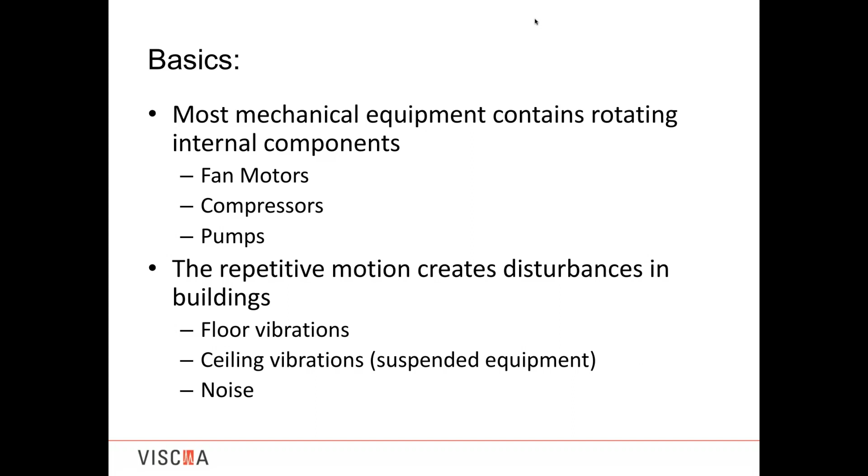Now, aside from the equipment itself creating some vibrations, the distribution systems for this equipment, since we're working in HVAC, we know we're moving air and water through ducting and pipe work. That movement of the air and water through the distribution system will create its own problems. When the pipe or the ductwork is going through a floor penetration, it creates vibration into the building structure. And when the equipment is rigidly attached to the piping and ductwork, the vibration from the equipment itself will be transferred through the ductwork and the pipe and then into the building that way.

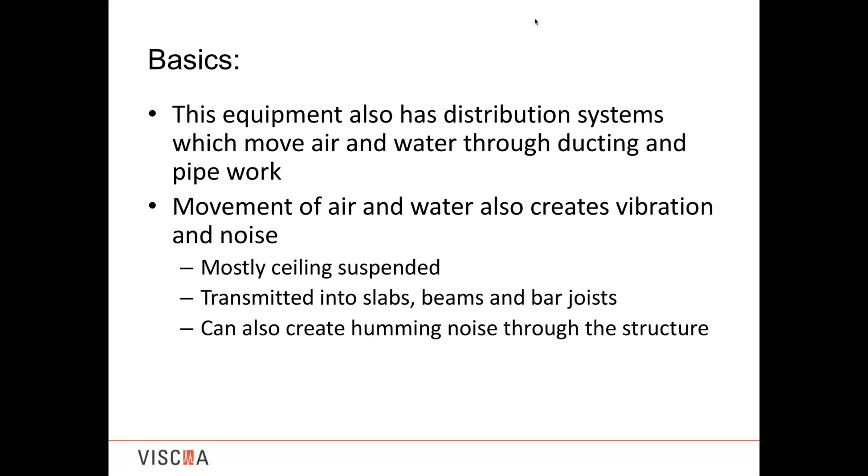You'll typically, mostly, see this in ceiling-suspended equipment and rigid mounted equipment to the base, but also the humming noise that you would get. Sometimes you won't feel the vibration, but you'll hear a sound, and that sound will be coming from vibrations where the equipment's distribution system is rigidly touching some building structure.

Now, again, we're keeping this very basic. Placing an isolator between the disturbance, which is the rotating equipment, and the structure reduces the transmission into the structure. But it just reduces, and no vibration isolation system can eliminate the transference of the energy into the building or the noise. You can never get 100% isolation. You'll always have some residual, but generally the specifications are written such that you just want to get it to where it's imperceptible to humans and it's not creating any issues within the building. But you will never get 100% efficiency.

Though the rotating equipment we typically deal with in HVAC and power generation, you'll hear discussions about inches of deflection and static deflection. Typically for it to be effective, we're looking roughly between 0.2 inches and 5 inches of static deflection. Later on, Angela will get into some of these definitions, but right now we're talking static deflection of the medium you're using as an isolator with the static load of the equipment on top of it.

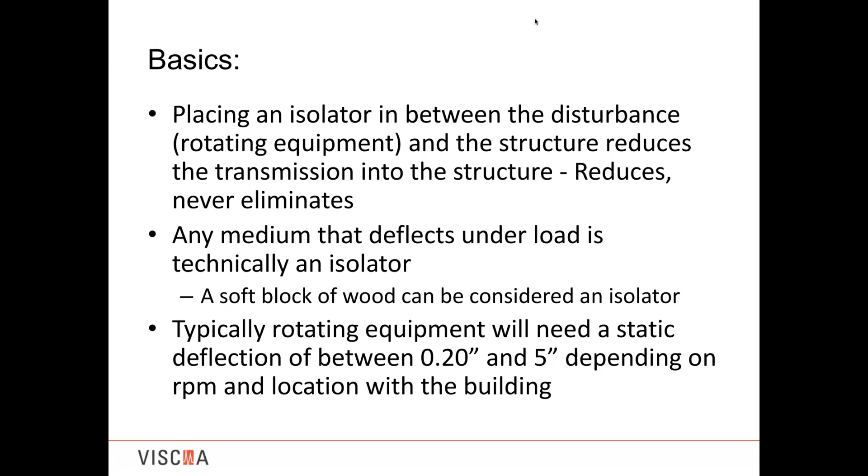And when I talked about 0.2 to 5 inches, that's what we're measuring. So obviously, if it's just a pad or a block of wood, you'll get hardly anything. If you've got a very tall spring, it can deflect on the order of 4 or 5 inches, and you have a lot of deflection in your system. It's the amount of that deflection which is critical to getting the isolation efficiency you'll be calculating later on through Angela.

Now, just deflecting itself doesn't necessarily make it an isolator. The medium you're using, after you remove the load, needs the ability to come back to its free height. If after loading it you remove the equipment and it stays where it was, it now doesn't have any static deflection. So the medium can't just be anything that squishes and stays. There are some materials that as you push on them, they stay and don't come back - that's not what would be considered an isolator.

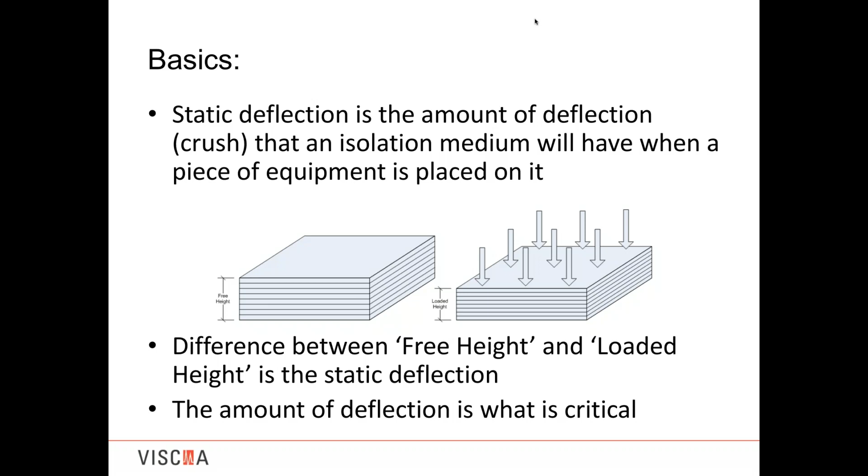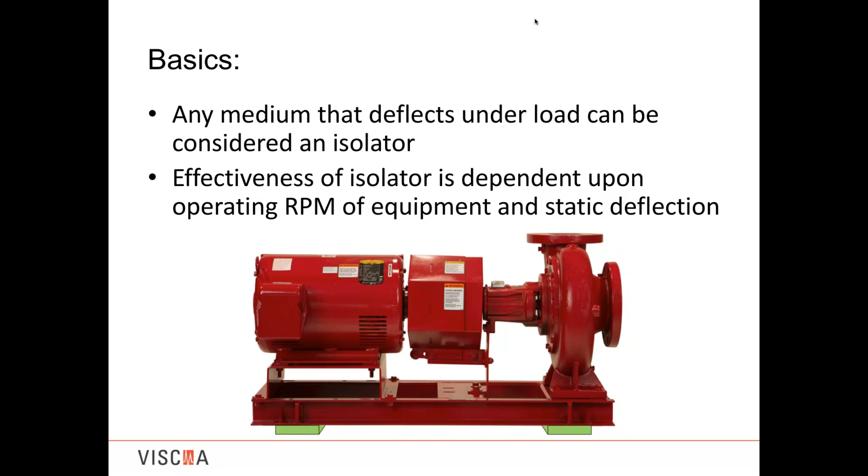In general, as the deflection increases, the efficiency increases at the same RPM. And that gets a little confusing, because what's happening is your required deflection becomes inversely proportional to your RPM. So as I have a piece of equipment with higher RPMs, I need less static deflection to get the same efficiency, and it may be counterintuitive at first.

A lot of the newer equipment out there, due to energy efficiency standards and such, will have variable speeds built in. So when you're asking for the RPMs, you may be receiving the highest, and you always have to verify there's no variable speed drives that will bring the motor speed down. Obviously, cooling towers are the big issue with these, if anyone's familiar with those. They have variable speeds down to the order of 300 RPMs, and they may have been designed a little faster, so you'll have a system that may only have 1 inch of deflection, and your efficiency drops dramatically.

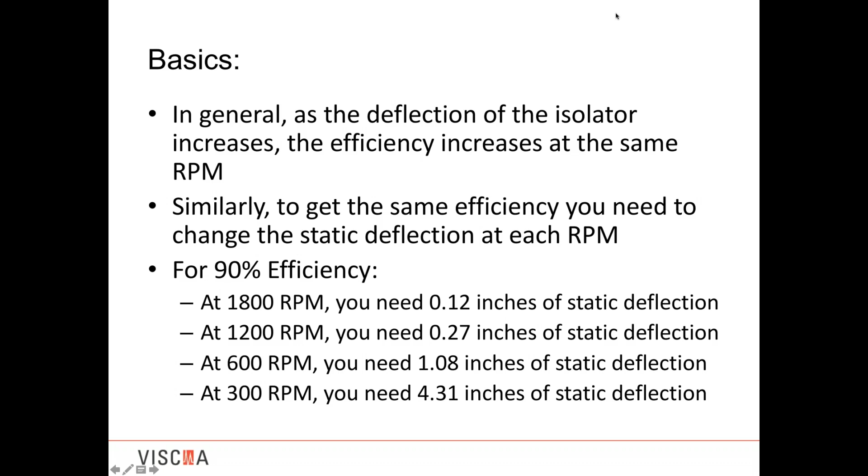In ASHRAE Chapter 48, and generally in our industry that VISCMA deals with, we discuss inches of deflection and RPM. We do not get into hertz or cycles per second as would be done analytically. Using RPM and inches of deflection, or its equivalent analytically in hertz, but it's not necessary since this is the information most people will get from a manufacturer, the RPM of the motor, and from the manufacturer of vibration isolators such as Kinetics and VMC, you get the inches of deflection of our springs. So ASHRAE Chapter 48 relates those two rather than going into frequencies in hertz and cycles per second.

So we've kind of, I don't want to say dumbed it down, but it's industry vernacular that we use that makes it a little simpler to compare two systems side by side, rather than worrying about the natural frequency of the system. What's the RPM? What's the inches of deflection on the springs underneath? They get you roughly the same efficiency. Well, thank you for that question.

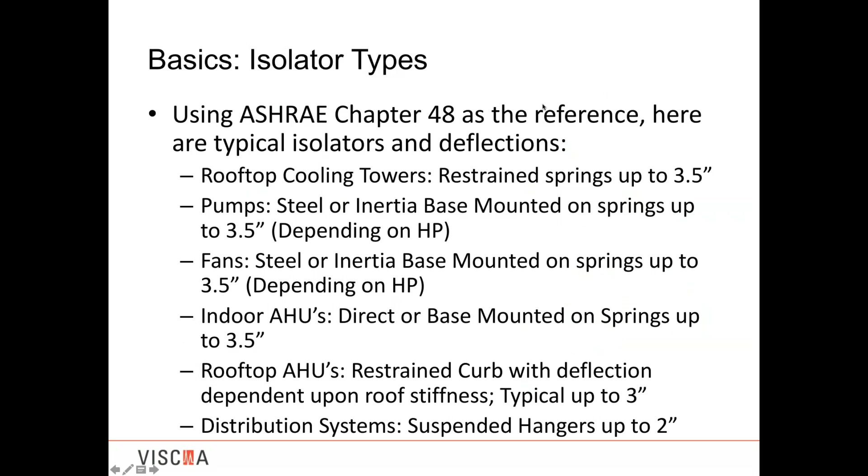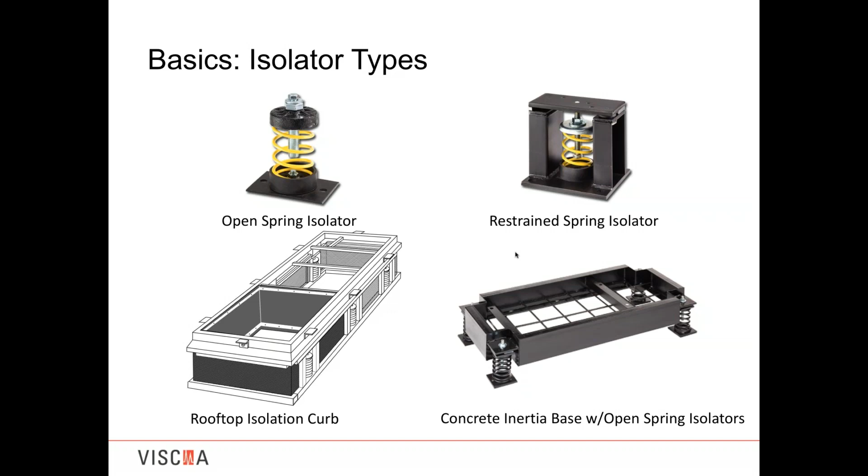They fill it with concrete in the field. After it cures, they can attach the pump or the fan to it before they lift it. It helps with the rocking motion, but most of the benefits of doing the analysis of an inertia base is outside of the basics. You'll see many pumps in the basement of buildings on these inertia blocks, and they can be offered with either of the two spring types on top, an open spring or a restrained housed spring, for the same reasons.

What I'll do now is I'm going to transfer it over to Angela Waters, where she'll get into more of the theory and the math, and she'll take it from there. Thank you, John.

Okay, I'm going to talk about the theory, the terms and definitions. John has touched on these a little bit as he's been going through the basics and introduction to vibration this afternoon. So vibration is basically undesired motion, and it's transmitted to the building structure and the occupants.

My background, I'm a structural engineer by education and training. Just as a load in a building has a load path, vertical and horizontal, noise through a building has a noise path. And when you're talking about vibration, vibration causes structure-borne noise. So you're basically taking a vibration that's an undesired motion and transmitting it to the building structure, causing it to vibrate and create a noise path.

So the isolation, how we counteract this vibration, mitigate it, minimize it, not eliminate it, as John mentioned, is we separate the source from the receiver. The source, an example would be a cyclic running fan, and the receiver would be the floor structure or roof structure. So we want to separate those with isolation, and that isolation in our industry is often a spring isolator.

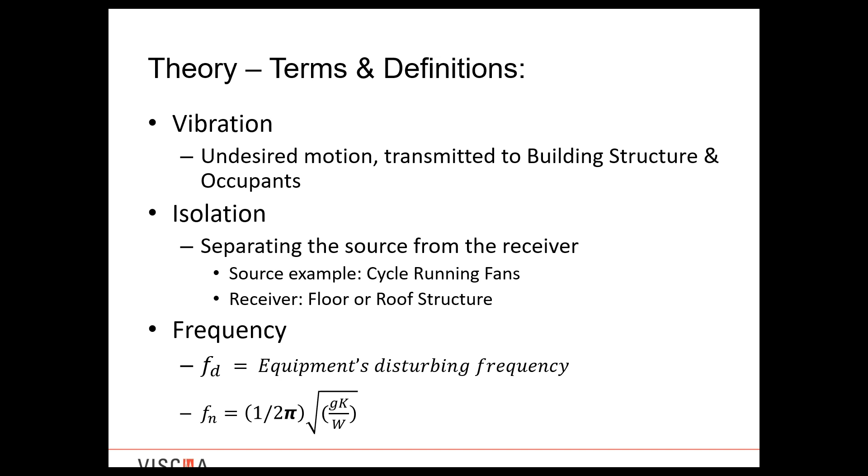So when we talk in terms of frequency, this F sub D is the equipment's disturbing, or driving, frequency. And F sub N is the natural frequency of the material or substructure, and that formula is 1 over 2 pi in the denominator, times the square root of gravity times your spring constant in the numerator over the weight in the denominator. We'll see later that you can have that in different terms of the variables.

So when we talk about deflection, and John was talking earlier about how in our industry we talk about cycles per minute or inches of deflection, you can have vertical or horizontal deflection. But again, it's that translation, that movement that's deflecting. Typically when we're talking about equipment, usually it's a vertical deflection. If we get into concerns regarding wind and seismic on that equipment, then we have to consider horizontal translation or deflection.

So the next two concepts are basic, but then they start to build like building blocks when you're learning new concepts. Later on I have some slides that visually show this, and I might advance to those so you can have a visual aid here. But you have a single degree of freedom system: there's only one object that is significantly moving in the system.

If you could picture a slab on grade, a concrete slab on soil perhaps outside an office building or hospital doctor's office, and you have a pump or piece of air conditioning equipment bearing on that slab on grade. The fans and motors inside are moving, and you probably have some internal isolation within that piece of equipment, but preferably the slab on grade is not moving. So the only thing with moving parts is your equipment; your slab on grade is stationary.

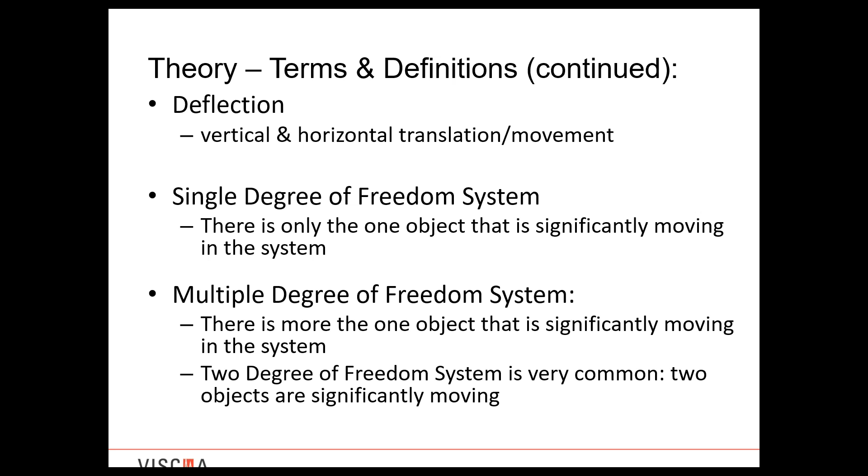So that example would be a single degree of freedom system. Now, when you have a multiple degree of freedom system, there is more than one object that is significantly moving in the system. An example we'll see on the next slide, but this example is a 2 degree of freedom system, which is very common: 2 degrees, 2 masses of equipment are moving.

So in this example, you have an internal fan of equipment moving, and the springs of the isolated equipment were both moving. If you think back to that illustration John had up with the 4 different types of spring isolator restraints, if you had a curb in that bottom lower left hand that had springs in it, that curb would be deflecting as well as your equipment is also moving.

So this really becomes a reason why internal and external isolation is either to be avoided or considered only when absolutely required, and much care has to be taken in the selection of isolation systems when you have a 2 degree of freedom system.

So typically on that slide with the 4 spring isolators as visual aids, in the bottom left corner with the sheet metal curb, or in the bottom right corner with the concrete inertia base with the springs, equipment bearing on that would not have internal isolation. So the only thing moving in the equipment would be the cyclic behavior of the fans and motors, but then you'd also have the springs and the isolation sheet metal curb or inertia base moving.

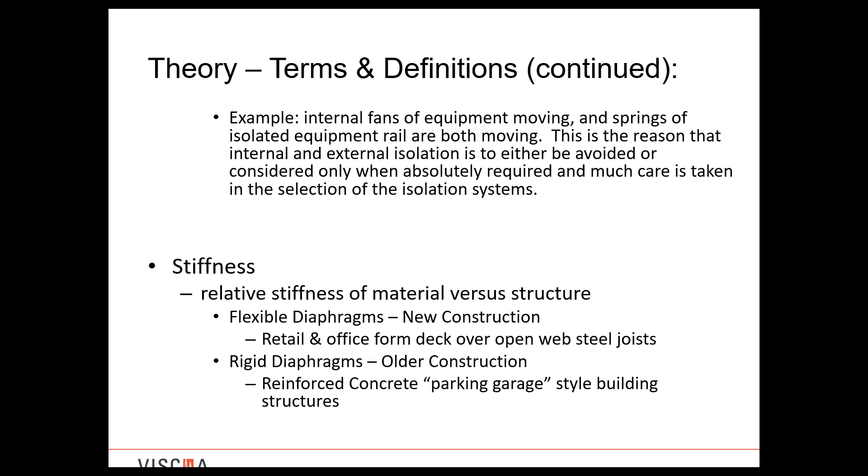Okay, so now we're going to talk about damping. We normally talk about damping in terms of a ratio, and damping is an attribute that all materials have. It's an intrinsic attribute that they have.

Office buildings 30, 40 years ago experienced a lot less vibration than they sometimes do today, and that was because those buildings were filled with all kinds of materials that provided damping just by the nature of their material. Filing cabinets full of paper documents would have provided extra damping. Additional partition walls, when you had true offices and less open cubicle space, would provide additional damping. So as our construction industry evolves, and how we use office and workspace evolves, vibration is oftentimes now a much more significant consideration in office buildings because we don't have as much of this damping.

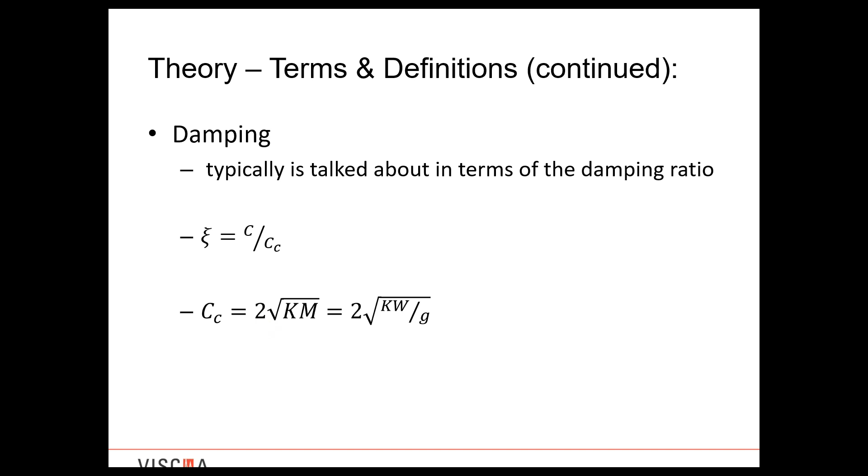Carpet provides damping. But as I mentioned, we talk about it in terms of a damping ratio. So looking at the damping compared to the critical damping here, this first equation, xi equals C in the numerator over the critical damping in the denominator. And the critical damping in this denominator is equal to 2 times the square root of your spring constant times your mass, or rearranged in terms of weight and gravity, 2 times the square root of the spring rate times your weight over gravity in the denominator.

And again, the damping factor is due to the damper, the dash pot, and C sub C is the critical damping of the system. You can provide measured or calculated damping through Coulomb dampers, which allow for some control over the variable damping ratio. Again, it's often expressed as a percentage of this critical damping ratio.

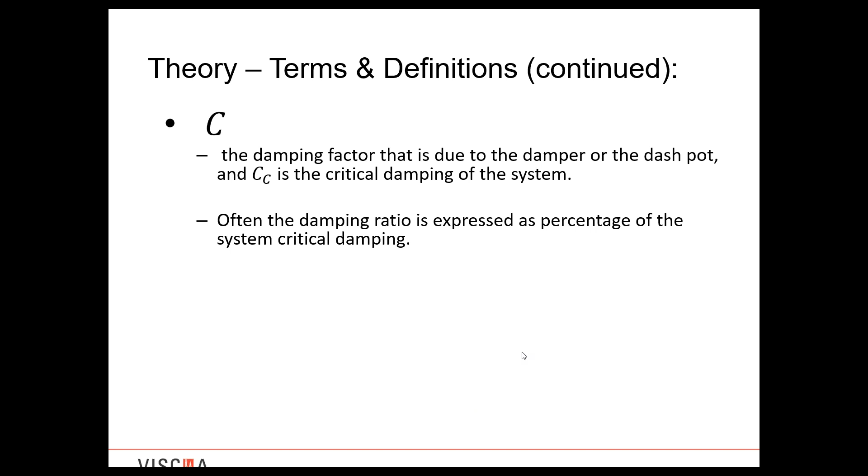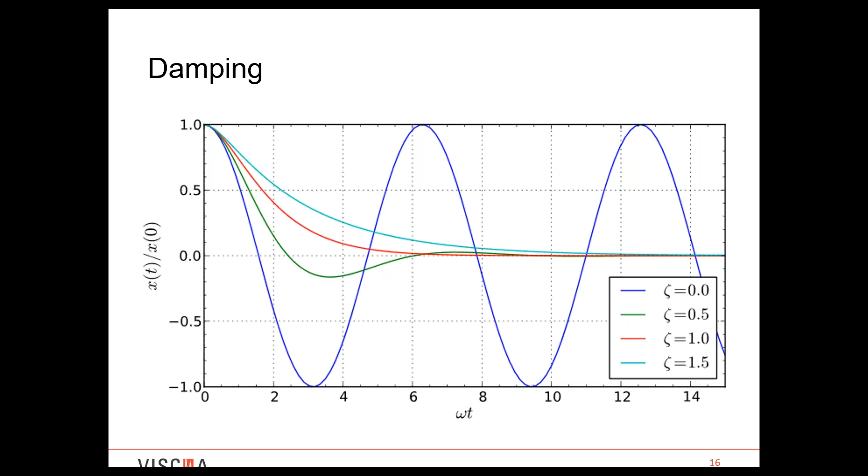So here's a chart to help illustrate what I've been describing with damping. You see this red line where our damping ratio is 1, and that is at your critical damping. The royal blue line, with just a large amplitude wave, has a damping ratio of 0, meaning you have no damping, which is considered underdamped. This green line, which also has quite a bit of amplitude wave, is also considered underdamped. And the cyan or turquoise line, we'd consider that overdamped. You're not going to get an additional advantage in isolation efficiency when you're over that damping ratio of 1. In this example, that turquoise line is a 1.5 damping ratio.

So again, as I mentioned, those at 0 and 0.5 were underdamped systems, and the system at 1 is ideally what your goal is to shoot for, the critical damping ratio of 1. Obviously where it was over 1.5, it's an overdamped system, and you're not getting much advantage for that additional damping. You won't see it in the isolation efficiency. So I mentioned earlier a single degree of freedom system.

I painted the illustration of having equipment on a slab, outside a hospital building. That slab ideally is not moving, it is bearing on the soil, and it's just the equipment that is moving. So you just have a single degree of freedom system with damping here in this illustration. On the right is your spring constant, K, and here is your damper through a dashpot or a Coulomb damper that's providing some damping to your mass here that is moving. So that would be a single degree of freedom system.

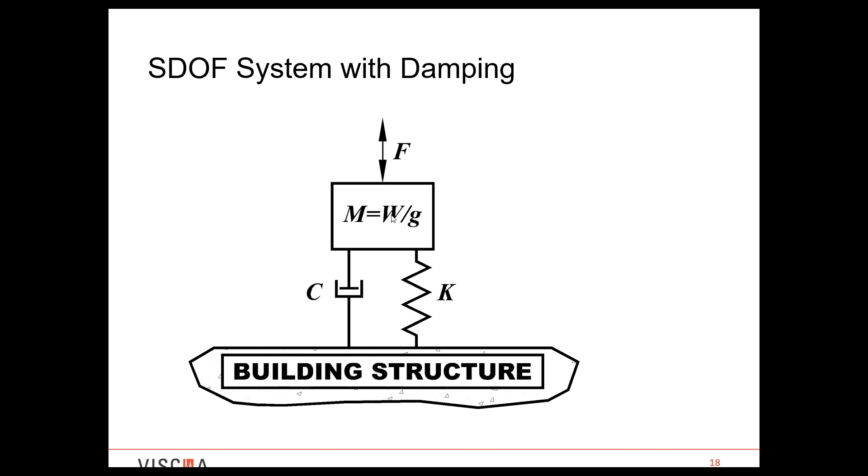Transmissibility is the ratio of the displacement of the building to the displacement of the mass. In our example, the equipment is also the ratio of the force exerted on the building structure to the driving force. It's the value that engineers and consultants use to evaluate the dynamic force acting on the building structure or the degree of force attenuation present in the system.

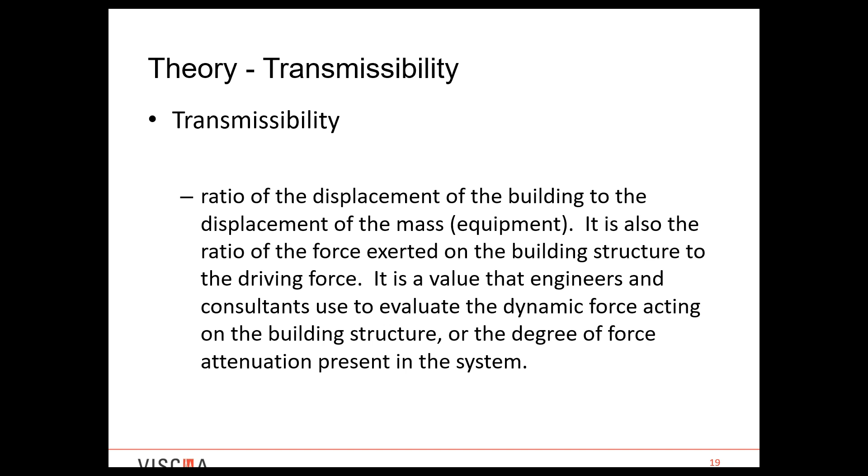So that's a term that if you're not familiar with it can seem a little overwhelming or abstract at first, but hopefully we'll show with some charts and equations to help everyone understand where that transmissibility is coming from.

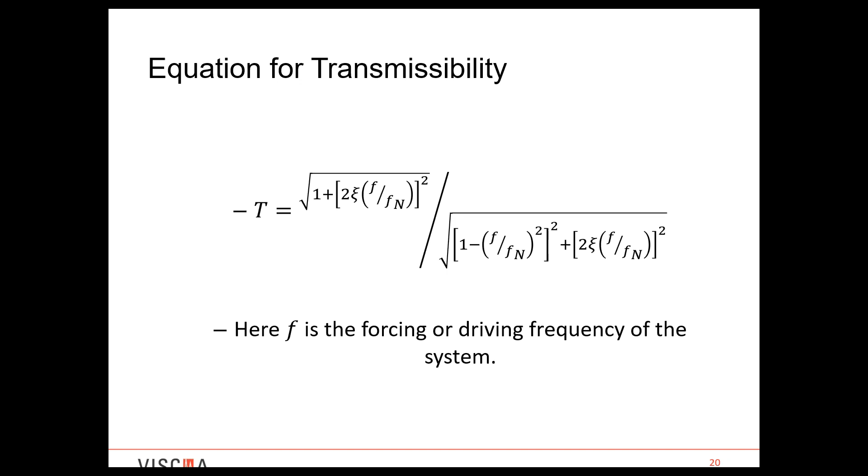If you look at it in equation format, in the numerator you have the square root of 1 plus this term: 2 times your damping times the ratio of your driving frequency F over your natural frequency F sub n, and that term is squared. That's all over the square root term where again you have 1 minus the ratio of driving frequency over natural frequency squared, that term is squared, plus another term squared, which is 2 times your damping ratio times your driving frequency in the numerator divided by your natural frequency in the denominator. So that is the equation.

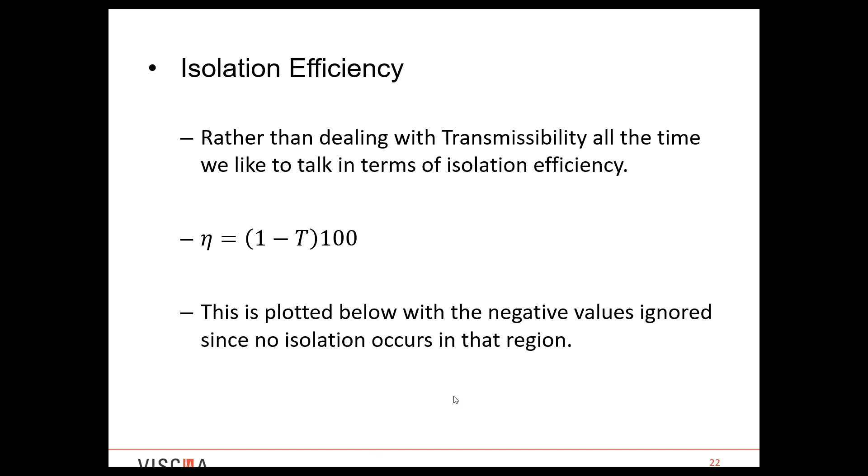So rather than dealing with transmissibility all the time, since it's kind of abstract or overwhelming if you're not familiar with the term, we like to talk in terms of isolation efficiency, which is basically if you take 1 minus your transmissibility times 100, that is your isolation efficiency. We have it plotted in the next chart here.

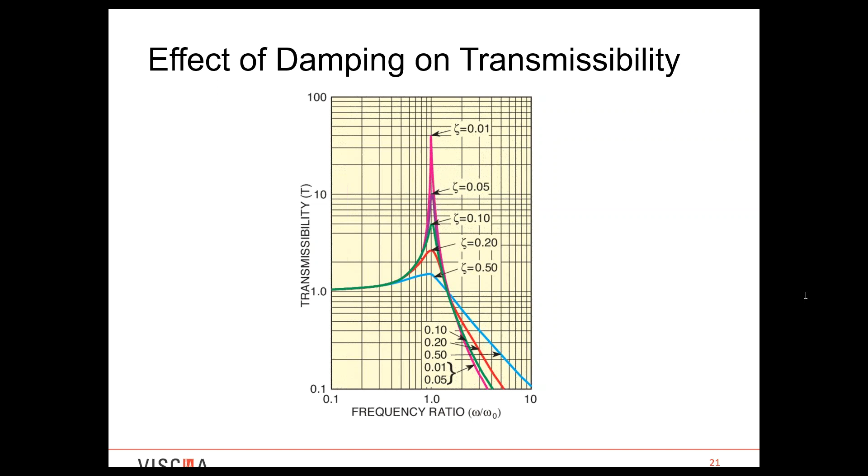Okay, so we've discussed this isolation efficiency curve pretty thoroughly here. So really, how much isolation is required? The ASHRAE Handbook Fundamentals Chapter 8 states that for most normal isolation applications in HVAC, the isolation efficiency must be at least 90%. In order for this to happen, ASHRAE recommends that we're greater than or equal to 3.5 for our driving or disturbing frequency in the numerator compared to the natural frequency in the denominator.

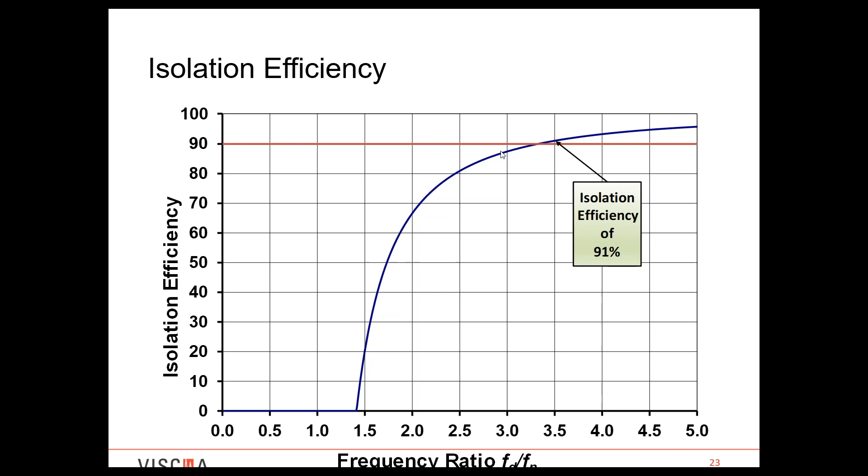Really that goal is so that subjectively people in the building are not going to be affected, since vibration can be very subjective. You'll have some customers who are very sensitive to the feelings of vibrations, and some who are very sensitive to any sound created from the structure-borne noise of vibration. But again, if you get up at that 90% mark, you should meet the subjective goals of the people using that building. If you're a little bit less, at 85 or 88%, you're going to meet most of those people. But again, the goal should be to try to get as close to that 90% isolation efficiency from the ASHRAE handbook as possible.

So here, looking at isolation efficiency at various revolutions per minute, RPM, as John described in previous slides in his bullet points. I have to make sure I look at this correctly because we have 2 shades of blue. The 550 RPM in a lighter, slightly light blue color is to the inside of this chart, so it's to the inside of the red, which is at 875 revolutions per minute. The green is at 1,350 revolutions per minute, and the dark blue again is at 1,750 revolutions per minute.

So as John was illustrating earlier, it is an indirect proportion. If you're looking at a static deflection of 2 inches with the 550 revolutions per minute, you're going to be at 93, 94% isolation efficiency. But you'll obtain that same 93, 94% isolation efficiency if we look at the green at the 1,350 revolutions per minute, where now you'd probably have a static deflection of less than half an inch, probably around a quarter of an inch or so. So again, it's an indirect proportion, but it's good to know what the isolation efficiency looks like for various RPM, various revolutions per minute.

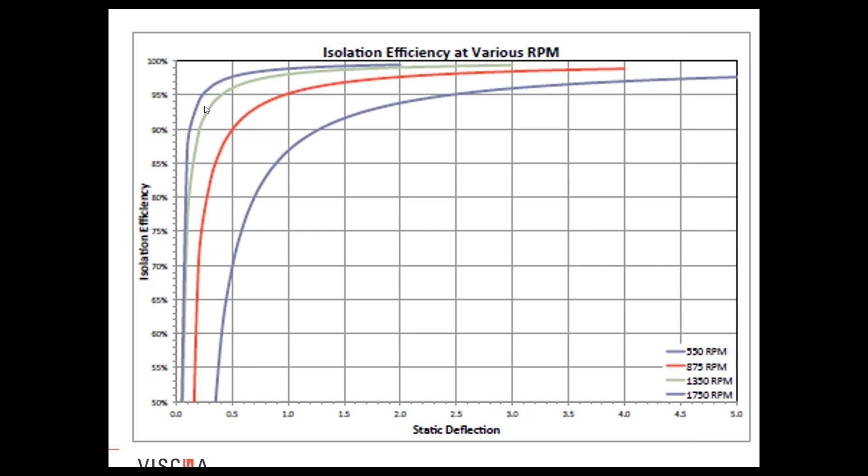If we think about deflection, we want to think about nominal deflection versus actual deflection. John illustrated before that deflection is the difference between the free height, or unloaded height, and the material loaded on the right-hand side of his slide. That deflection is our goal, and we need to think about that. But oftentimes in specifications, if they're not too specific, they'll list deflection which is nominal or approximate. What you actually have in operating conditions out in the field is your actual deflection.

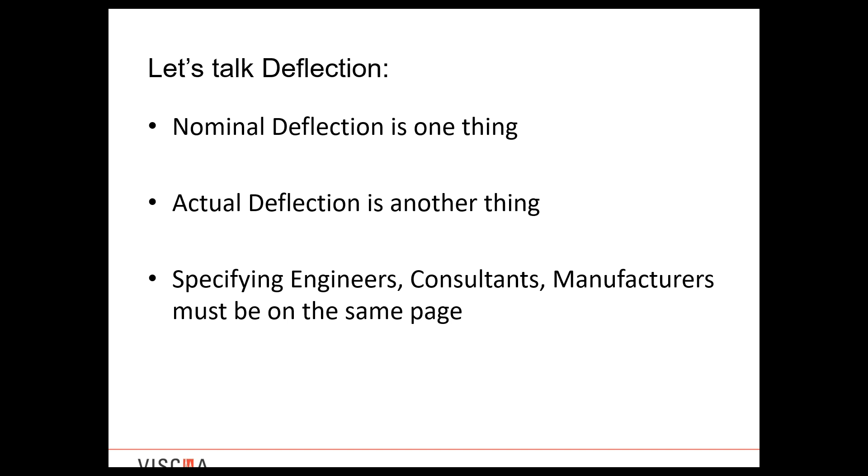So when you're working as a team, whether in the schematic or development design phase of the project, the specifying engineers, engineers of record, consultants, manufacturers, and sometimes even contractors and subcontractors, we have to be on the same page understanding the specification for a particular project.

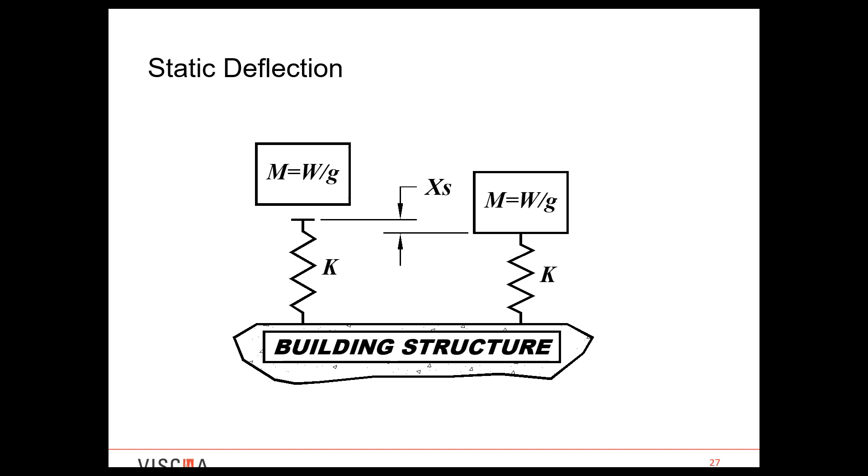Looking at static deflection, if you have your building structure, and on the left you have your mass or weight divided by gravity, and your spring hasn't been loaded yet, that static deflection once it's loaded is shown on the right. So it's that static deflection. As John mentioned earlier, it gets confusing once you get into spring isolators, especially since spring isolators in our industry have an opportunity to have a preload at some point. Just because you're talking about a 4-inch deflection spring or a 2-inch deflection spring does not necessarily mean that spring is going to deflect that amount after it's already loaded. So we get into terms like differential deflection, which is the deflection you're going to see after the isolator is loaded.

Looking at just the static deflection from the weight itself, you can express it in terms of natural frequency: f_n equals 1 over 2 pi times the square root of gravity over your static deflection, x_s, where that static deflection equals your weight in the numerator divided by your spring constant in the denominator.

If you set gravity in English US customary imperial units to 386.4 inches per second squared, you can look at it in the units of the second equation here, which is often used by consultants: 3.13 times the square root of 1 over your deflection. From my university days, I tend to think of gravity as 9.81 meters per second squared, or 9,814 millimeters per second squared. You can think of it in terms of that gravity with 15.77 times the square root of 1 over your static deflection.

I hope this is giving you some definitions and ideas of how we look at vibration isolation efficiency, transmissibility, and a bit about damping, although John is correct that typically in our industry we can't count on damping. So unless it's specifically designed, we presume that damping ratio is zero. At this point, I'm going to turn it back over to John, and he's going to give you some good ideas of what not to do, and hopefully what to do.

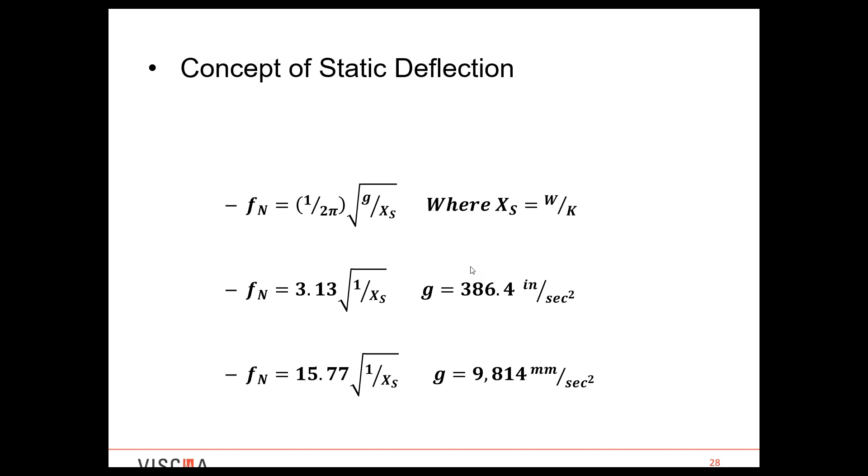Okay, hopefully everybody sees the best practices, do's and don'ts screen. But before I move on, I wanted to address one or two questions that were popping up as you were going through, Angela.

You ended up on a good slide there because I guess we ignorantly or arrogantly assumed everyone understood we were using imperial inches-pound-second units. Most of the time when we're discussing weight, we are talking pounds force, not pounds mass. Obviously when Angela had a few equations up there, she threw in G. Hopefully that answered the question, but I want to address it for those who weren't looking: when we're talking weight, we're assuming pounds.

Somebody brought up a question about Chapter 48 in ASHRAE, and it's worth repeating rather than answering it independently. The question was whether or not the assumptions in Chapter 48 are overly conservative. I actually look at conservative as a subjective term, and I made sure to stress that the members of ASHRAE TC 2.6 have many years of experience. So maybe analytically something may show as a little overly conservative, but it comes from practical experience, knowing what to do and what not to do. You may wonder why something requests 3.5 inches of deflection when analytically it doesn't show so, but I put my faith in the experience of those engineers, knowing there's a reason, that they've had issues, they've seen, and they understand. But if you'd really like the answer on whether the charts in Chapter 48 are overly conservative, I'd send ASHRAE TC 2.6 that question and see the answer that comes back.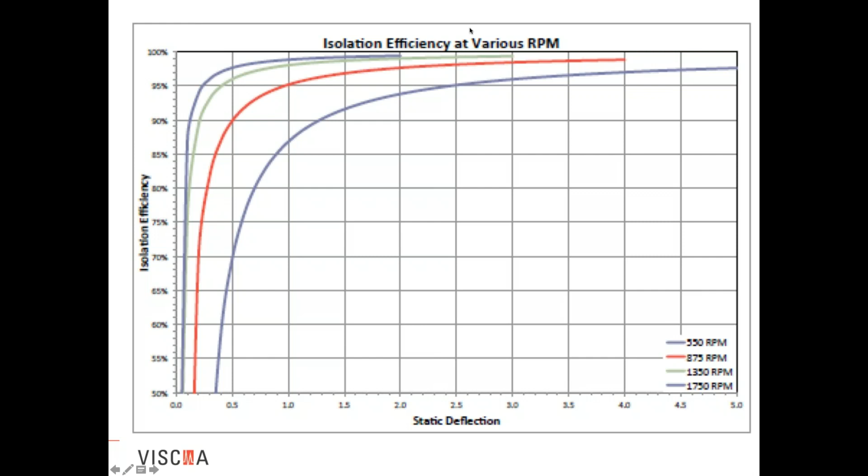Obviously, if you're selecting it down here, first of all, you're selecting it improperly. But now, yes, minus 20%, I dropped 10% in my isolation efficiency - not a good thing. So all the selections that manufacturers of VISCMA will be making are up in this range of the curves, such that any minor change from nominal to actual will not affect your isolation efficiency. It's an important point to remember when you're looking for problems, trying to find problems, or just reviewing an installation submittal.

All right, so now I'm going to get into some quick slides on what to do, what not to do, what we typically see as an association in the field that happens. And the biggest issue we see is non-adjusted isolators.

Most problem phone calls we get from installing contractors, hey I have a problem with this installation, or users of a building - it's the isolators are not adjusted. So our first answer to all of those questions is please take a picture and send us a picture of the installation. It is extremely important, whether you're an engineer, specifying mechanical, or the installing contractor - I don't know who's on the call - but please make sure the installer reads all the instructions. Every manufacturer has slightly different variations. You can't say, well, I've been installing manufacturer A's isolators, I know how to do manufacturer B's. It doesn't work so simply. Read the instructions, and a large portion of your problems will go away.

And the next biggest issue we see are rigid utility connections - piping, ductwork, conduit to the equipment. I can't stress enough how, especially on pumps, flex connectors must be on there. Something has to be flexibly connected. If you're rigidly attached to the next series in the system, and that next series is non-isolated, you have a rigid path for your vibration to go through, and it doesn't matter how many inches deflection you have underneath your pump - you're moving that vibration downstream. So flexible connectors on everything, especially conduit coming up from the slab underneath going into your equipment that's running the electrical wire or a gas line - they have to be flexibly connected. You're just going to completely short circuit the isolation.

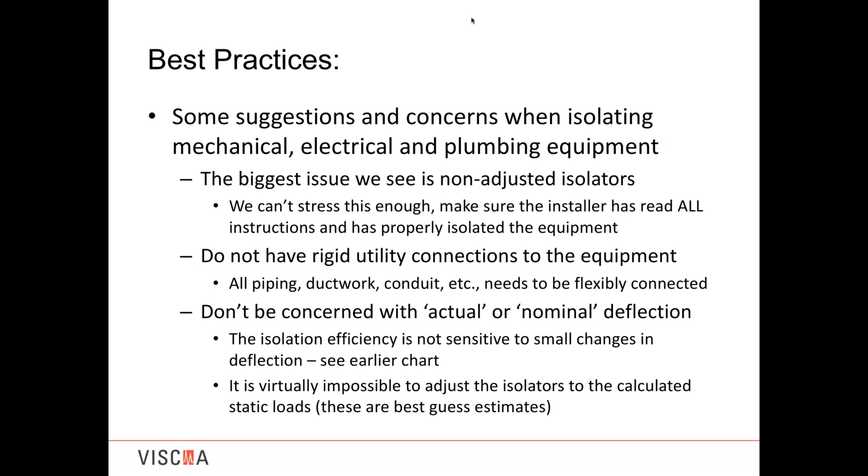One other thing I don't know if I mentioned before I move on: Angela touched upon internal isolation. Some of the bigger pieces of equipment have internal fans that are isolated. If you're putting an isolator on the outside of that equipment, you need to lock out or put the blocking back in for the internal piece of equipment. Otherwise, you have a spring on a spring and you run into other issues. That happens very often. Rooftop units will have springs underneath the internal fans, but if you're putting them on a 2 or 3 inch deflection curb, that internal fan needs to be locked out.

Another issue we see, and I'll show it on further pictures, but you may have seen or heard of them: shipping spacers. The housed isolators are typically shipped locked out with shipping spacers, such that the free height of the isolator doesn't change after you install and adjust it, so all your piping and plumbing into the equipment doesn't need to move. But you need to remove the spacers since they're short-circuiting your isolation. Every manufacturer has their own installation instructions, but most importantly, you should never remove any of the spacers until you can remove all of them.

As you're adjusting one corner of a piece of equipment, you're transferring weight back to the other corner. So if you've removed those spacers, you're going to bottom out the opposite corner of the equipment. It's no different than watching NASCAR, where they turn screws on one corner of the car and move weight to another corner. It's very similar on a piece of equipment adjusting isolators. You need to keep the shipping spacers in there until you can remove them all, and then you'll level out the equipment without short circuiting it.

Another issue you have to always concern yourself with is point support. I have a picture later on to describe it, but in general, some equipment is not designed to have a spring or isolator supporting it at a discrete point. It needs distributed loading so it doesn't buckle or collapse, and it's the manufacturer of the equipment who determines that. Many of those that require continuous support will send out a submittal cut showing this. You need to look for it, and if the manufacturer says so, you need to follow his instructions. If it wasn't designed for point support, you will have structural issues with the equipment after installation.

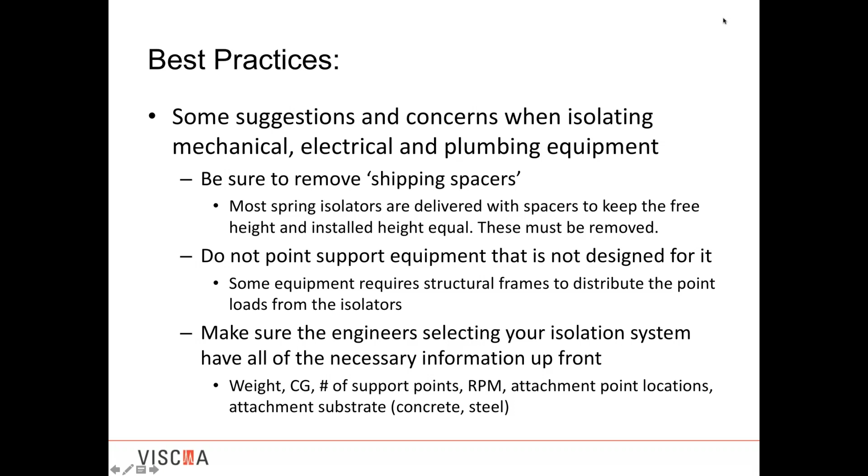Let me go back to my slides. All right, so here are some field issues. I've got a few pages showing some field issues we run into.

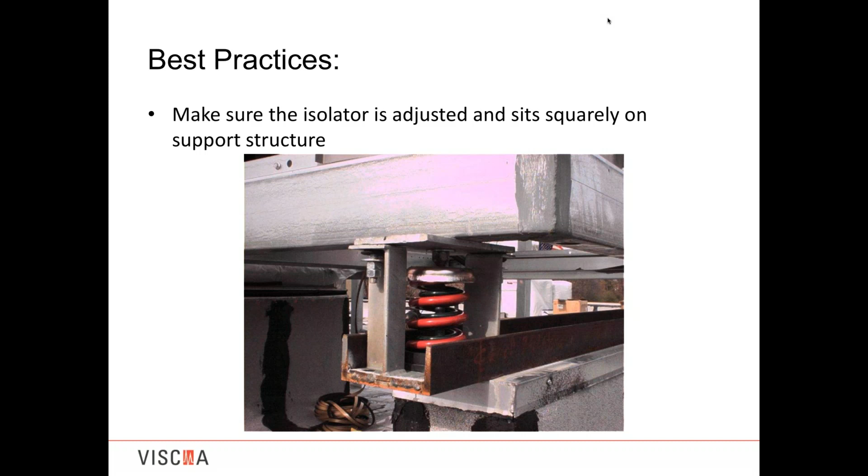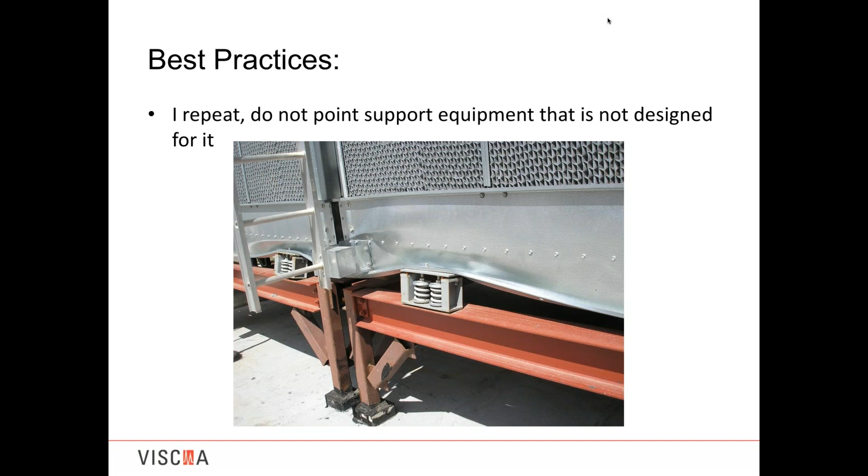And that's the last one. Now I'll double check if we have another question about minimum deflections. All right, so the question deals more with Chapter 48, and at this point I think it's outside the scope of where we're going. Some of these questions are more directed towards ASHRAE.

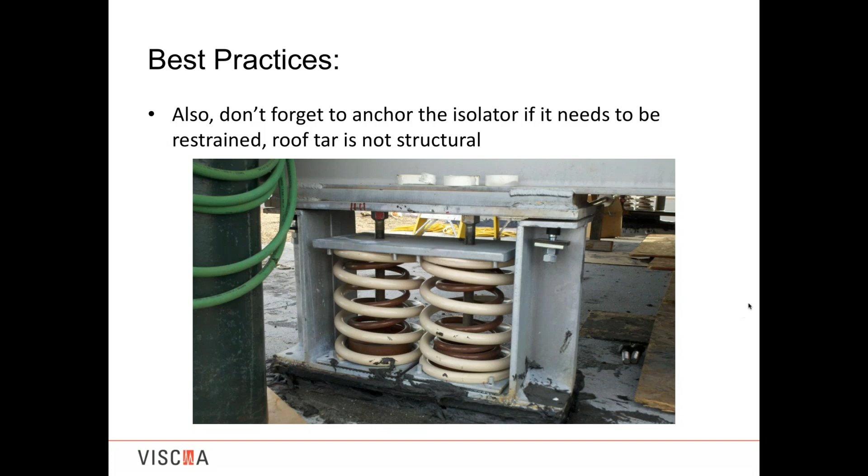So Jody, I think at this point I'll transfer back to you. I'll just scroll back up to the beginning, and you can take it from here.